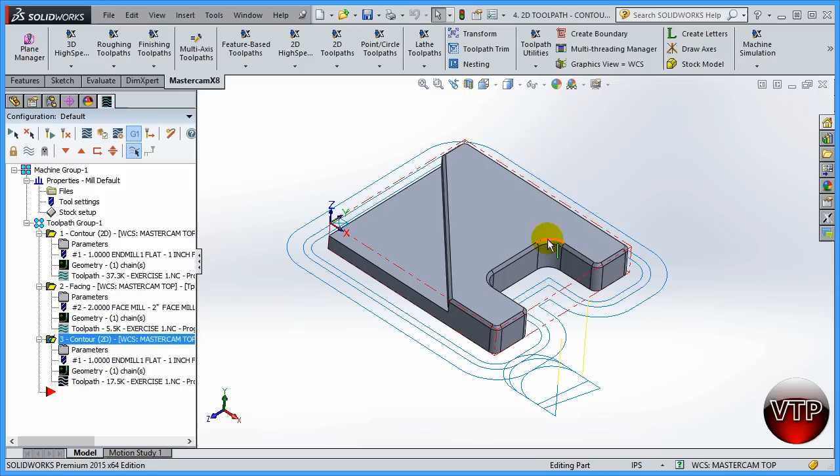All right, so last but not least, we're gonna create this chamfer right here all around our part, okay? So it's gonna be created all around here. So let's go ahead and turn off the last operation's toolpath right here and go ahead and start by creating this. So go ahead and click on 2D toolpath and it's still gonna be contour, okay?

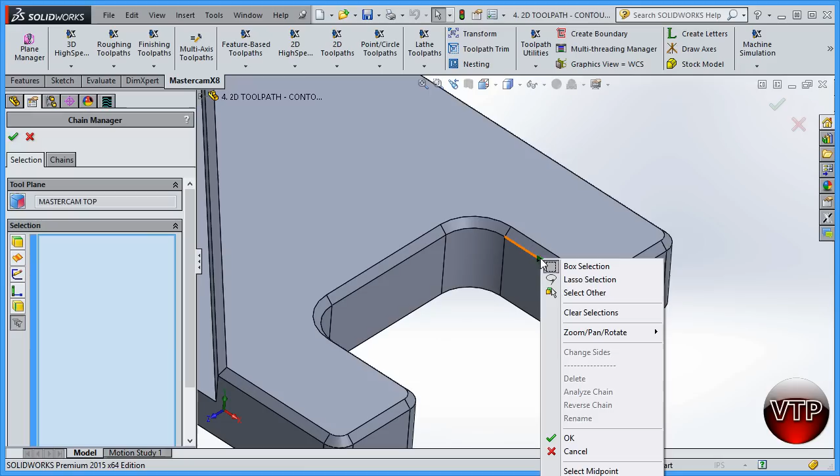For this one, remember in the last operation, we've selected this bottom edge. For this one, let's go ahead and select this edge. Now, not the top one, but this edge right here. So I'm gonna zoom in real quick, select it, and then go down and select tangencies. Now, if you can't see it because it's a little bit off the screen, let me go back real quick, zoom in towards the top, select this edge, and click on select tangency. And there you go, SolidWorks will select this entire toolpath all around my part.

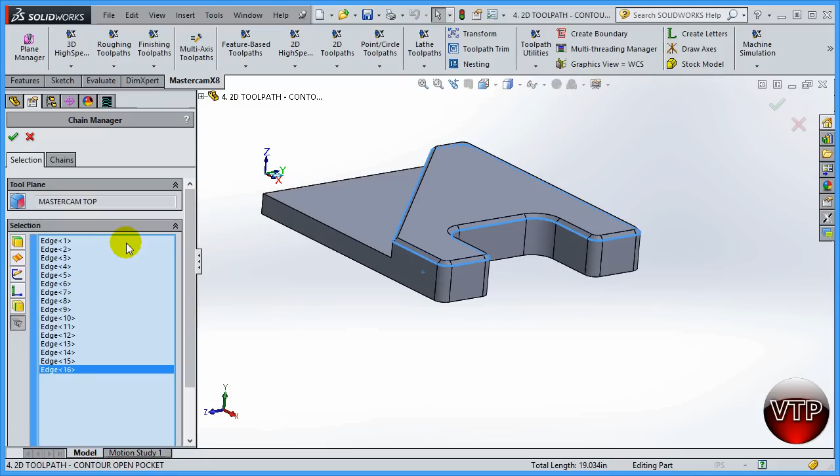Now, if it doesn't go all around the entire part, make sure you can come over here and select this edge as well. So now you have that going through the entire part. So now that you have that done, come over here to chain and make sure we set a starting point. Okay, so make sure you select chain, come down, and then you're gonna see the start point is right here. I'd rather it not be here. Again, I don't want my tool to come down randomly anywhere. In this one, because we've machined the pocket already, it's not bad, but I still like to see the start point be around an outside edge or corner of the part.

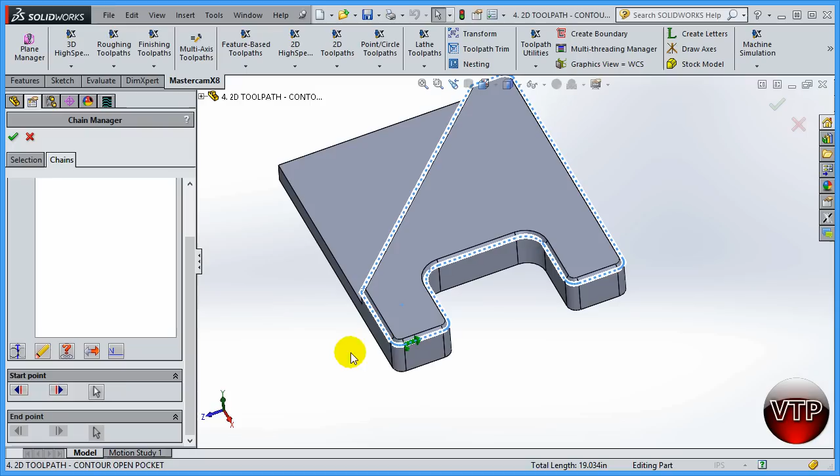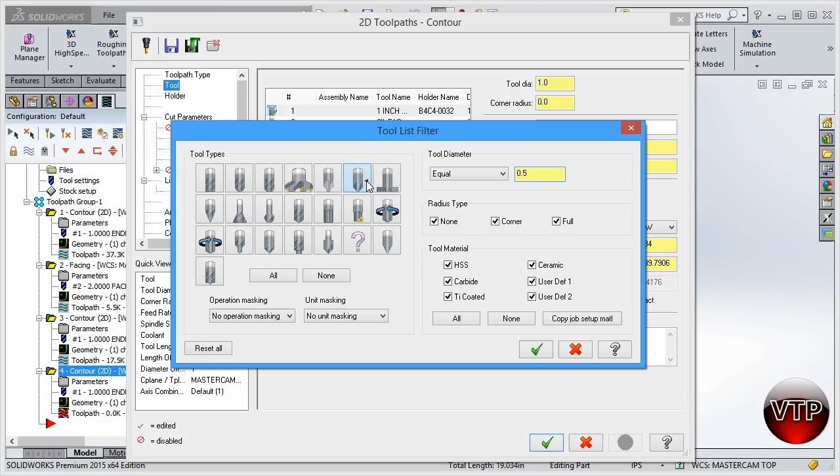Much safer. So go back over here, and let's go ahead and select it the same way we've selected to start machining the outside contour. Select it to be right here. So move it all the way back until you get right here and click on OK. All right, for the tool, you're going to come over here under tool. And for this one, we are forced to use a new tool. So we're going to have to actually go here to filter, end mill, and let's go ahead and select 0.5. I'm sorry, not an end mill. We're going to come over here under chamfer mill, 1/2 inch, and then click on OK.

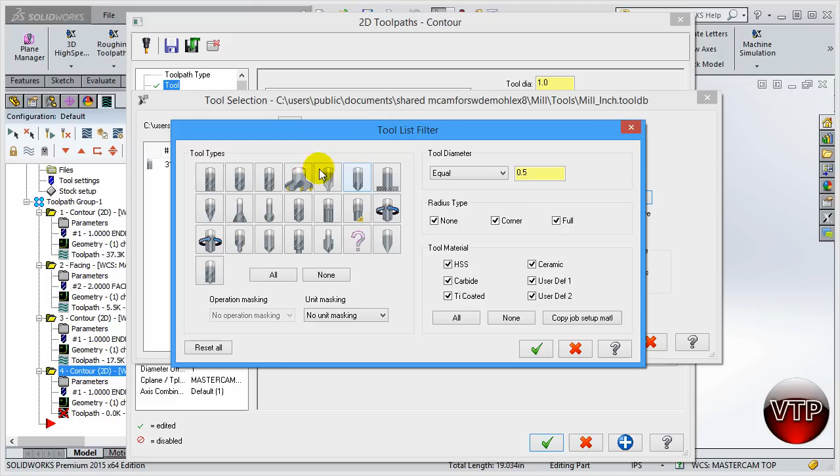All right, so what I've done over here is I've actually made a mistake. I filtered from the tools that are here. I don't want to do that. So I'm going to uncheck this, go back to select tool, library tool, and then go to filter over here. Make sure I have this selected and then click on OK. I've already selected these, so that's why the default goes back to them, the last tool that I've selected. So go ahead and click on OK. And there's your 1/2 inch chamfer mill.

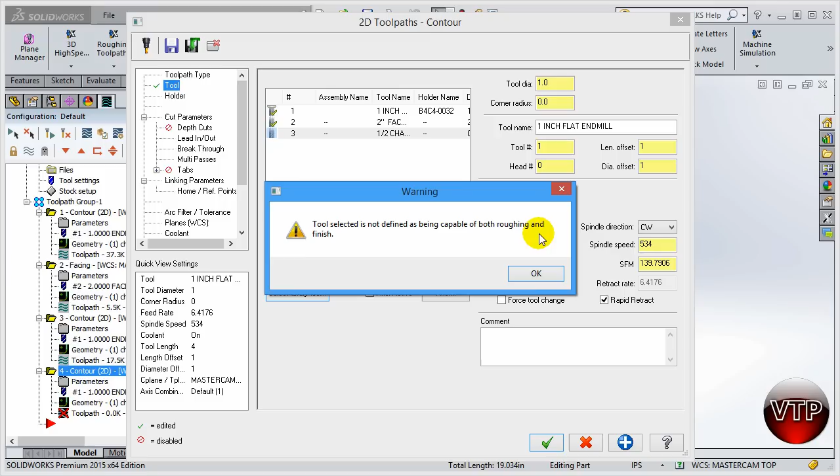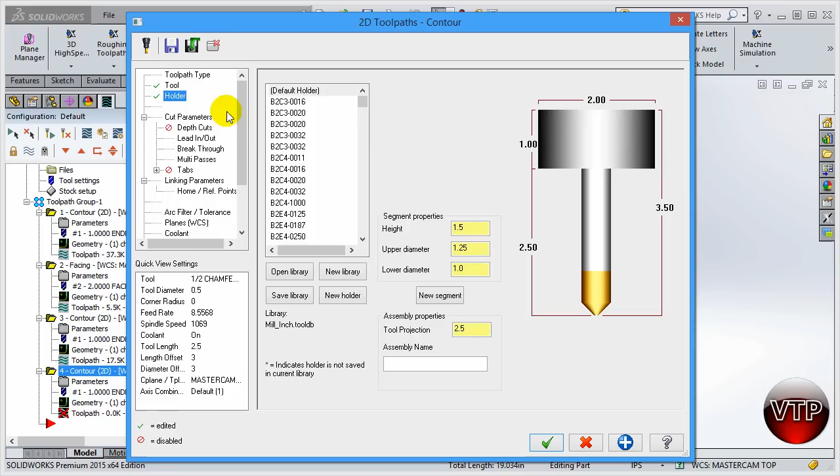Now click on OK. So it now says tool selected is not defined as being capable of both roughing and finishing. This is just a warning. Now we're not roughing or finishing, obviously. We're just creating a chamfer. So we're going to say OK to accept that. Make sure rapid retract is there. And again, you can always come over here, change the name of the tool, and also change some aspects of them, a different corner radius, things here and there. Again, in this tutorial, I will not do that. So holder, and it doesn't matter what holder you use. Let's just keep it as the default holder.

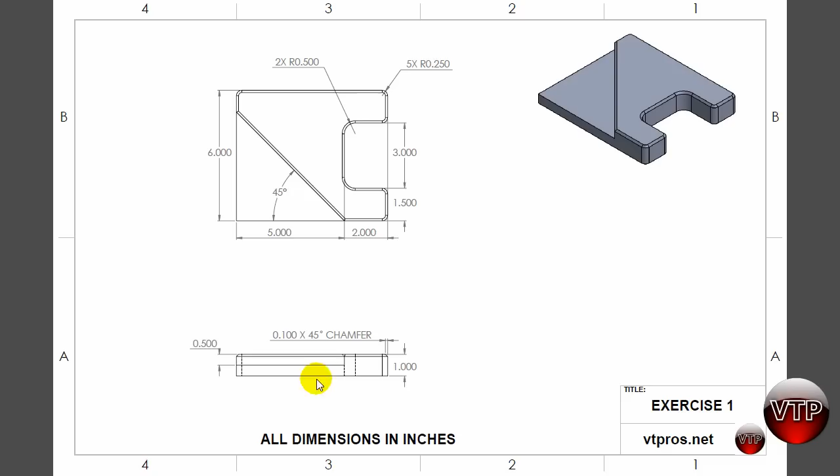And then cutting parameters. So the only thing we're going to have to change is come over here under 2D chamfer, and you're going to see two new options. First is the width. The width is what you get from the drawing. So if you open up your drawing, you're going to see that I have it as 0.1 times 45-degree chamfer. So I need to make sure that it's 0.1. And it's already selected as 0.1. And the next is the tip offset. Obviously, you don't want it to be machining right at the tip. You want that tip to come down a little bit so you don't get any burrs on the edge right here. And usually I like to see it go over by 0.1.

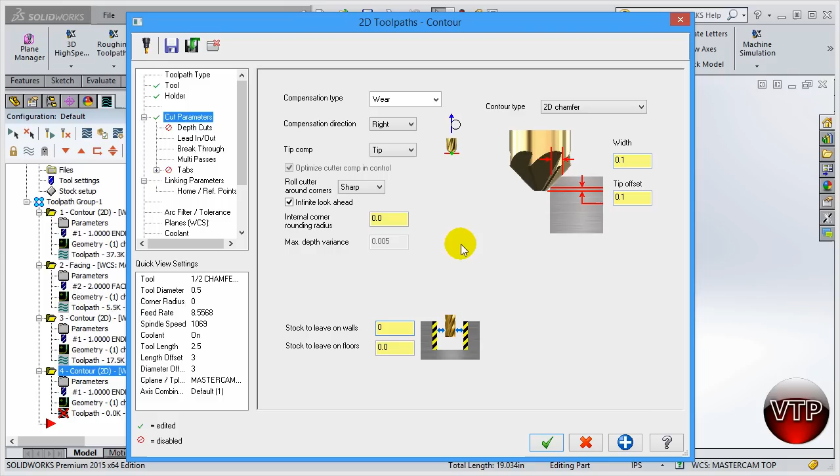So do 0.1 by 0.1, and you can always zoom in and see the operation take place so you can see what's going on. So leave it at that. Come over here under stock to leave on wall and select 0. I'm not leaving anything. I'm just going to be doing one pass through the entire part. Now the depth cut, we're going to leave that as off.

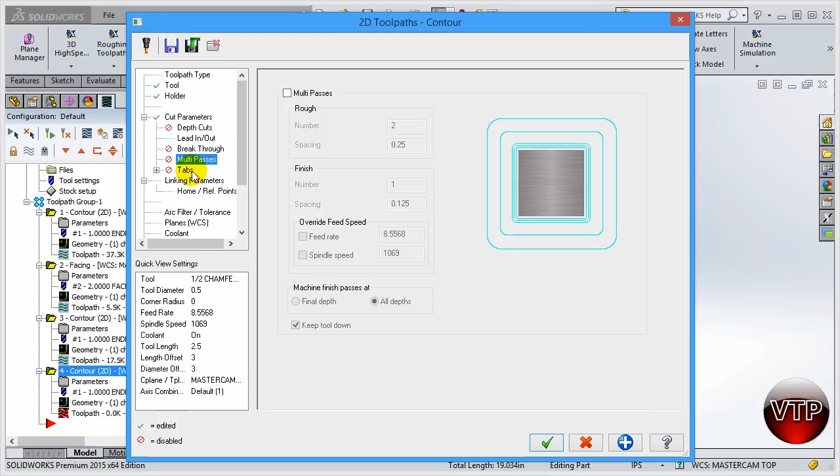Come over here under lead in and lead out. We're going to keep everything the same. We're not going to be breaking through, so go ahead and uncheck that. Multi-pass is always going to be off. It's also going to be off. We're not going to be doing any extra passes. Okay. Linking parameters. Everything is going to stay the same as it is.

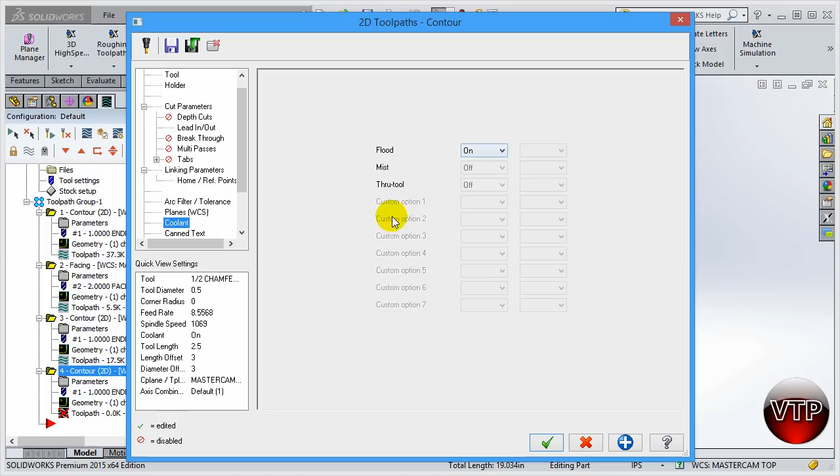Just make sure for the depth you select absolute, and just select 0 over here for it. Okay. After you're done with that, you're welcome to turn on the coolant if you want. Usually for chamfers like these, it's not very necessary. It'll depend on the material and how much of a chamfer you're making, obviously. But we'll go ahead and get in the habit of turning the coolant on as a flood.

And click on OK. And again, it's going to show that the tool comes down here and ends here. So it already again shows that, and there you go, you can follow the blue line all the way across. So that means you know that it is creating the chamfer. But let's go ahead and verify that to make sure that it works.

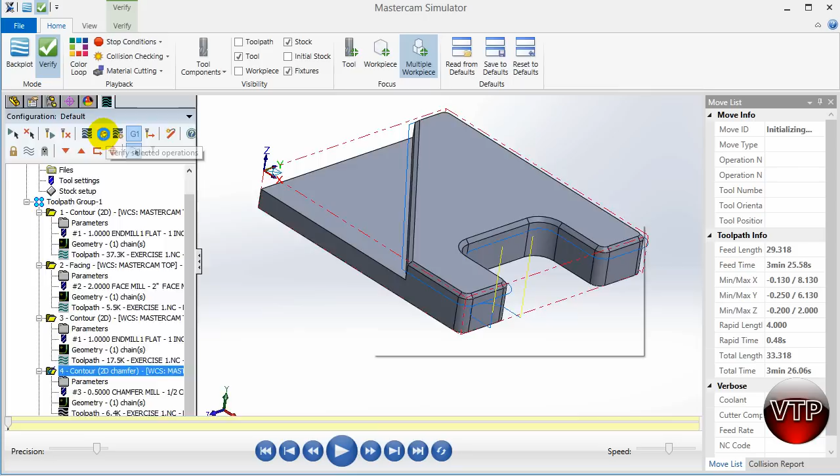So go ahead and click on your verify selected operation, and this is only going to be one operation, but you're going to notice that the block, the entire stock is still there. So one good thing to do, I'm going to exit out of that, is actually to select both this and the last operation together by holding shift and selecting both of them. Okay, so there's 1 and 2 operations. So now you got toolpath for both of these operations. And then go to verify screen.

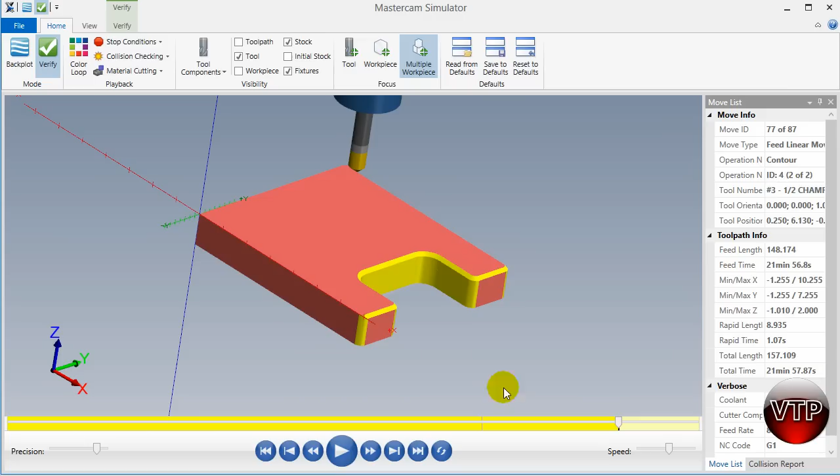All right, so let's go ahead and do the first one. Click on play. And it's going to finish that first one. And I paused it real quick because there's a line right here, and this is where my second operation starts. So every time you see this line, that means this is one operation and this is a second operation that you've selected. So as you can see again, it's going to come down here. I'm going to start it over again so I can see it slowly. So I'm going to come over here, slow it down, and press play.

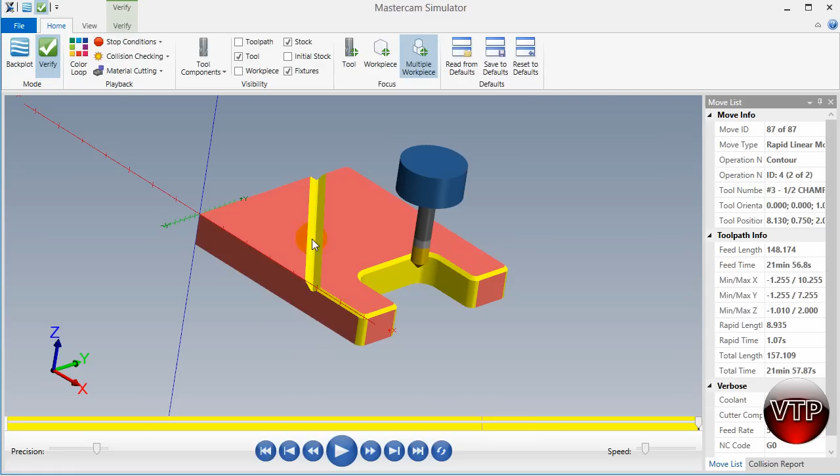And you're going to see it's machining the pocket right now, and then it's going to get to the chamfer right about here, and you're going to see that it goes all around our entire part right here. Exactly. Now, obviously, it's going to look like this here because we haven't showed this bottom part. So let's go ahead and verify our entire operation so we know our part is going to look exactly like this being finished. Go ahead and select all operations by clicking this button. You're going to see all the toolpath, and then click on verify operations.

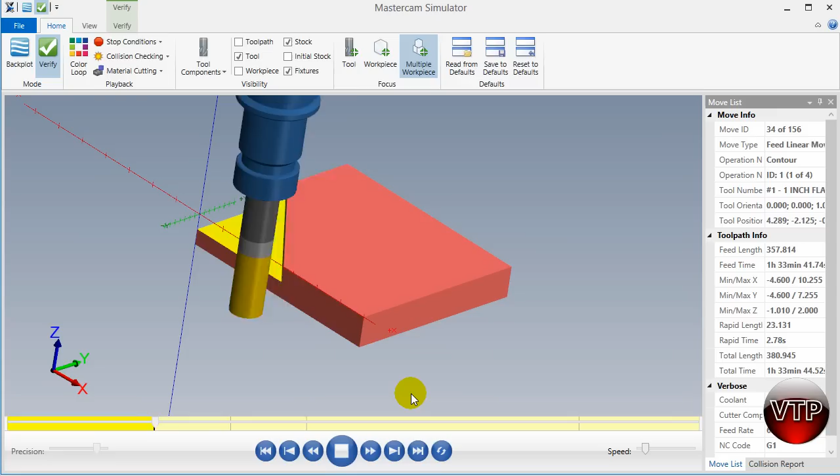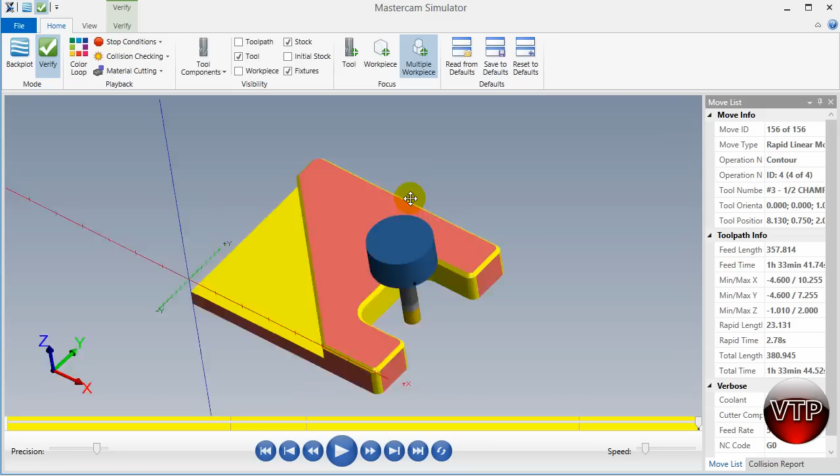Go ahead and click on play. And there you go. You're going to see the first operation take out that open contour. Then you're going to see the facing operation take place. And then you're going to see the open pocket machining going around your entire part. And there you go. There's your chamfer all around the part. Looks really nice. I can rotate my part, look at it, make sure everything looks good, and it does. If I go back to my part, you're going to notice that it looks exactly the same. I'm going to turn off my operation. It looks really good. Okay, and there you go.

This concludes our exercise number 1. So in our future exercises, we'll be getting a little bit more difficult as we go along, so we'll go a little bit faster. The harder material gets, the faster we go. The more we learn this stuff, basically, the more parameters we learn, I'll just be going in and changing parameters. And obviously, anything new, I'm going to be explaining.

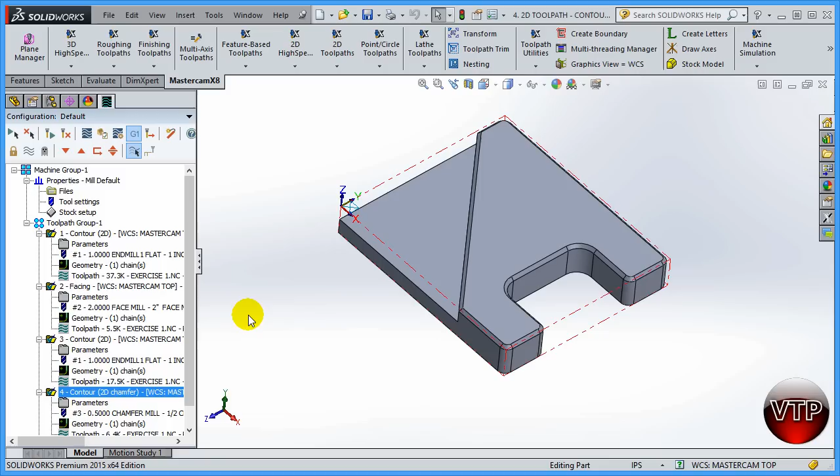And every single exercise, there's going to be something new that we're going to be learning, and I will be going over that new thing in every exercise slowly. But most of these things that we've created, for example, any of the parameters that we've changed, we will be going over fast from now on, so we're not wasting time explaining everything in every exercise.